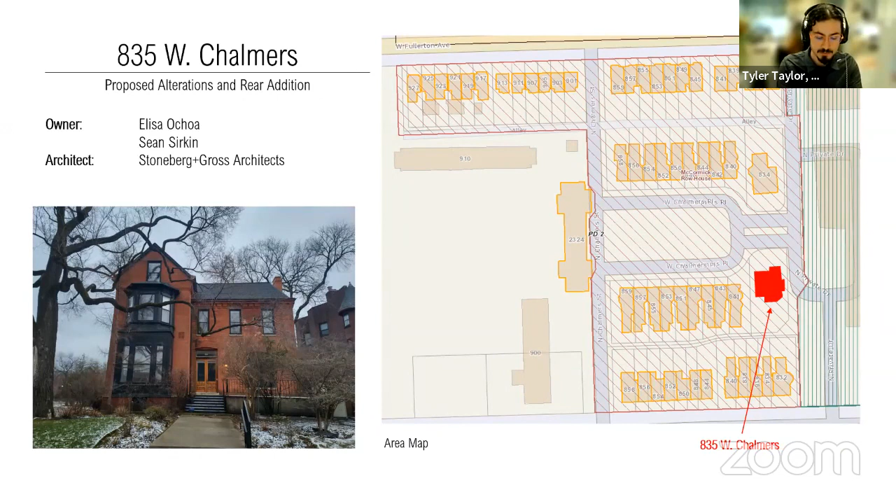This photo on the left shows the rear of the building. The existing wood bay to the left will be removed along with a portion of the surrounding masonry wall to allow a small shed roofed addition. The non-historic wood frame porch structure on the right will be removed and replaced by a new outdoor dining terrace covered by an open pergola.

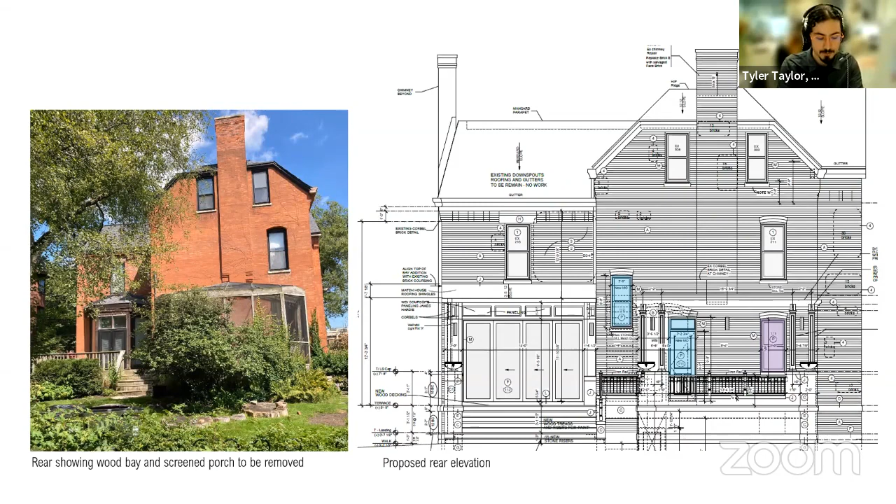The existing masonry opening for the rear door to the screen porch will be slightly enlarged for a new door to the dining terrace, highlighted in blue. A new window in a new masonry opening will be added to the rear adjacent to the door, also highlighted in blue. One window will be replaced in its existing opening with new clad-wood windows to match the historic profiles, highlighted in purple. The remaining windows, including frames, sashes, brick molds, and trim, are to be completely restored. Minor masonry repairs will also be made to all elevations.

The red highlighted areas in the existing plan to the left show the portions of the rear exterior wall to be removed. The proposed plans at right show the new addition, highlighted in blue, that extends 4'9" from the existing rear wall. The addition allows for the expansion of the family room on the interior and contains a new set of sliding doors to access a new rear deck.

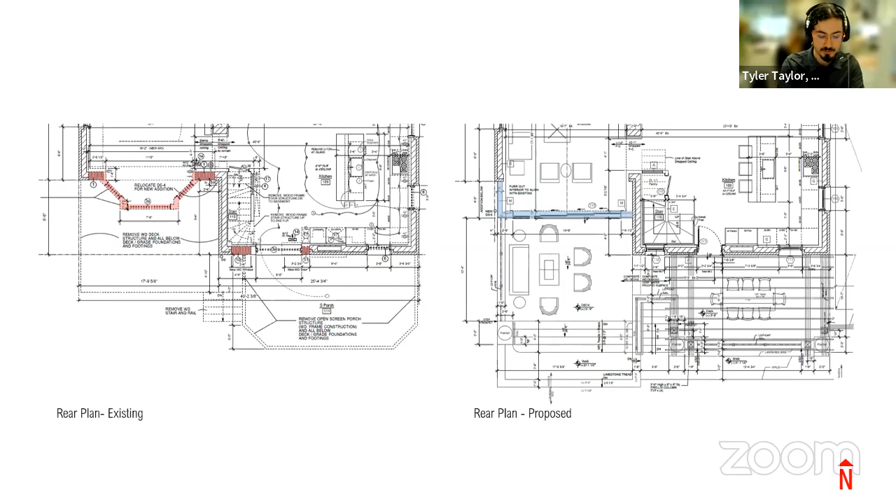On the east elevation, 7 windows highlighted in purple will be replaced in the existing openings with new clad-wood windows to match the historic profiles. The remaining existing windows are to be restored.

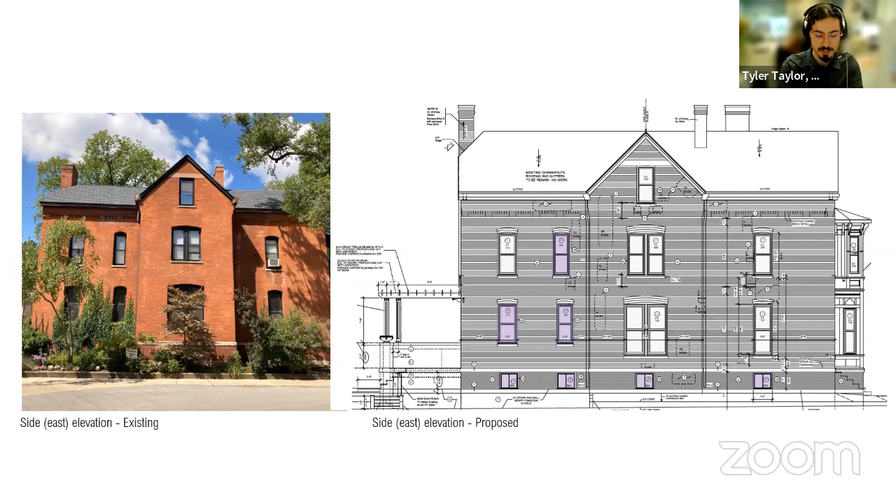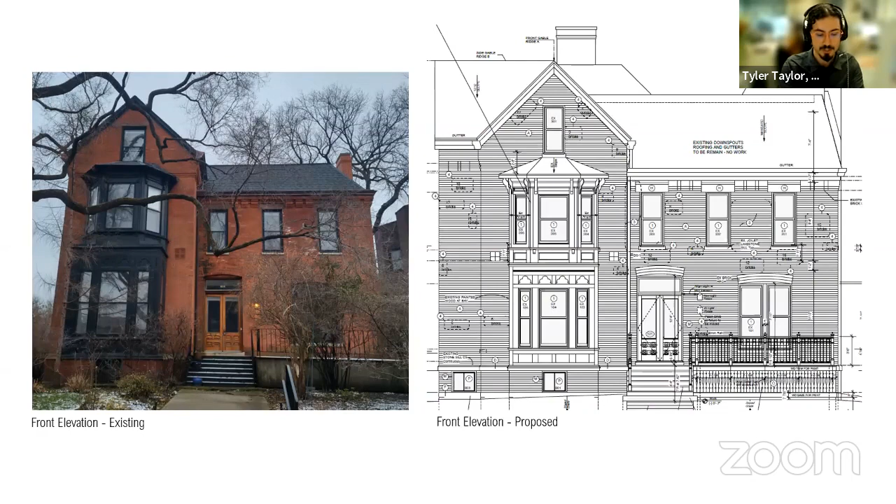At the front elevation, the historic wood bay to the left is to be restored. The porch is proposed to be rebuilt with new guards and rails. All of the windows are existing and will be restored. The original front porch was altered or demolished at some point in the past and replaced with a larger one. The existing porch is proposed to be reconstructed with the same area and dimensions.

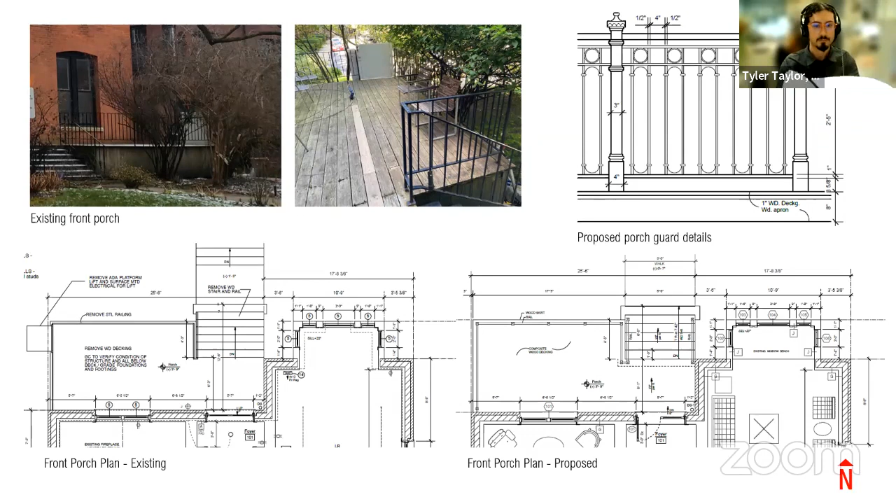The commission guidelines for inappropriate changes made in the past state that many buildings have been altered over time. Often these alterations represent inappropriate changes. When rehabilitation work is being undertaken, consideration should be given to removing inappropriate additions and changes, restoring the building to its original design and character. Existing situations that are inappropriate may be maintained if no substantial work is to be undertaken on them. However, existing changes that are inappropriate may not be retained if they are to be rebuilt or substantially altered.

Reconstruction of the porch at its current size does not meet the commission's guidelines. The owner is not proposing to reconstruct a roof over the porch to match the historic image, but constructing the porch to match the historic size will allow this to be done in the future if they so choose.

Staff recommends that the project as shown on the drawings dated 11/11/22 is approved with the following modification: the proposed new front porch shall be reduced in size to match the footprint of the historic porch based on historic documentation, or alternatively, the existing front porch may be maintained and repaired. Any replacement masonry units used in the repairs are to match the existing in size, shape, color, texture, and finish. Mortar shall match the existing in color, profile, texture, and strength or type. Samples of masonry are to be provided for review with the resubmission of the permit drawings.

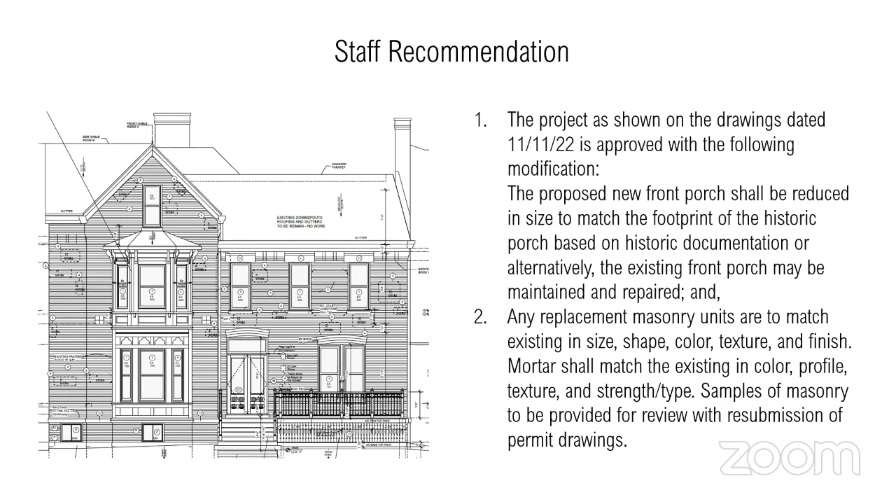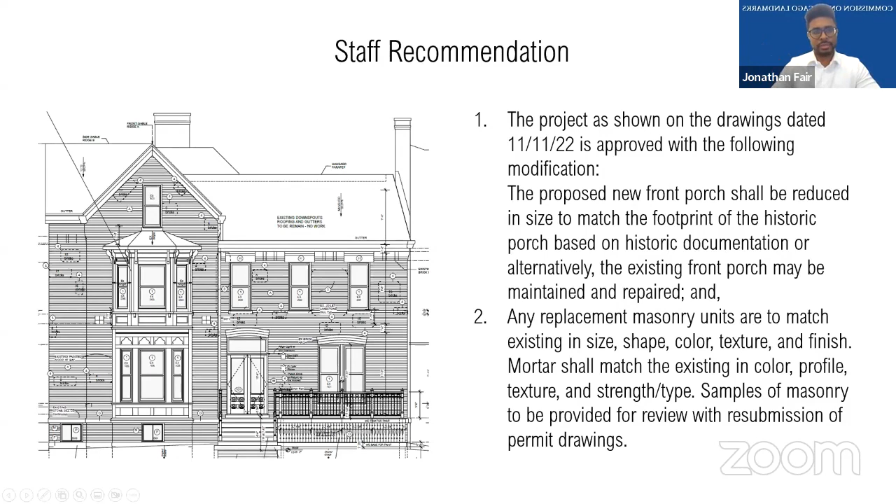I just had one follow-up question for Tyler. I wasn't sure if we knew from that Sanborn map you shared earlier what that dimension was. We don't have the dimension, but we're basing it on how it was drawn, showing that it's aligned with the front wall. The Sanborns are not always drawn exactly to scale, but the difference between the historic size and the current size is substantial enough that we'd be able to tell the difference from the Sanborn.

Okay, that makes sense. I think the two options or approaches are pretty clear. And Commissioner, if I might add, typically in these situations you could see some evidence physically on site underneath, if there are certain structural conditions where it was extended, and you may be able to judge based on physical evidence.

That's a good point, thank you for that. If I could just say, I've looked at the structure underneath the deck. As architects, we've looked at that, and you can see the original deck structure has been added to. The framing has been extended.

The other thing, thank you Tyler for putting this Sanborn up. I think this Sanborn map is fairly accurate, because if you look at the drawing of the front porch, the center pavilion, the entry pavilion extends beyond because you can see in perspective, by the depth of the column, that the column is in line with the masonry. So the Sanborn is pretty accurate — it's just a diagram, but a very accurate one showing that the front porch did align with the masonry, while the center pavilion, which extends higher hierarchically, was in front by the depth of the columns.

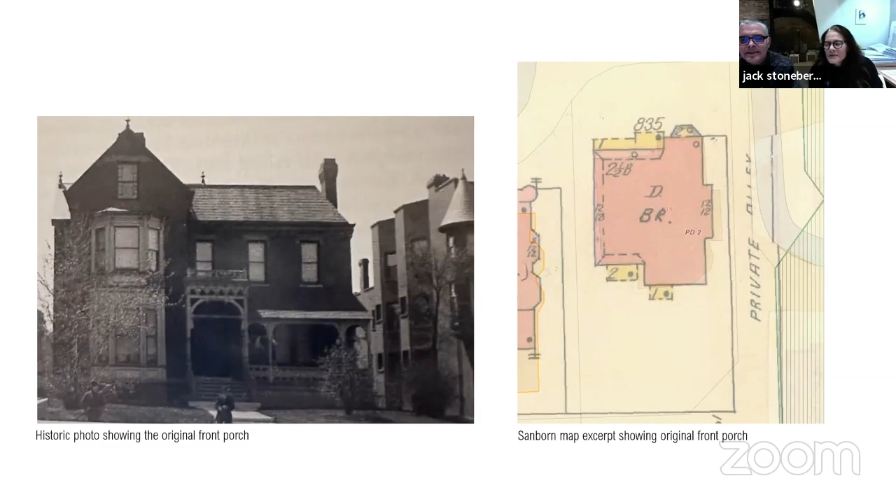So that's clear in terms of the depth. Tyler, we're pretty clear on how we're moving forward. Yeah, we just — thanks, I think Julie just wanted to say that IHPA has been a great asset and assistance to us over the last couple of months.

Yeah, thanks for that background. It sounds like the Historic Preservation Division has had a similar mindset as the Illinois Historic Preservation Agency. I think the recommendations are pretty clearly laid out. So with that, any other questions or points of discussion, commissioners?

Seeing no further discussion, I'd like to request a motion to adopt the staff recommendation. Do we have a motion? So moved, Commissioner Fair has moved. Do we have a second? Second, Commissioner Ponce — seconded by Commissioner Ponce.

We'll do the roll call. Commissioner Hughes — yes. Commissioner Rubin — yes. I'm a yes. The motion carries unanimously.

Congratulations. Thank you for the thoughtful work you guys have done, and good luck. Thank you, Tyler, for your help. Thanks, everybody. All right.

Moving on to item number 3 on the agenda: 841 West Chalmers, 43rd Ward, Alderman Knudsen, McCormick Row House District — the replacement of an existing one-story rear addition and a new one-story addition. And Tyler, here you go.

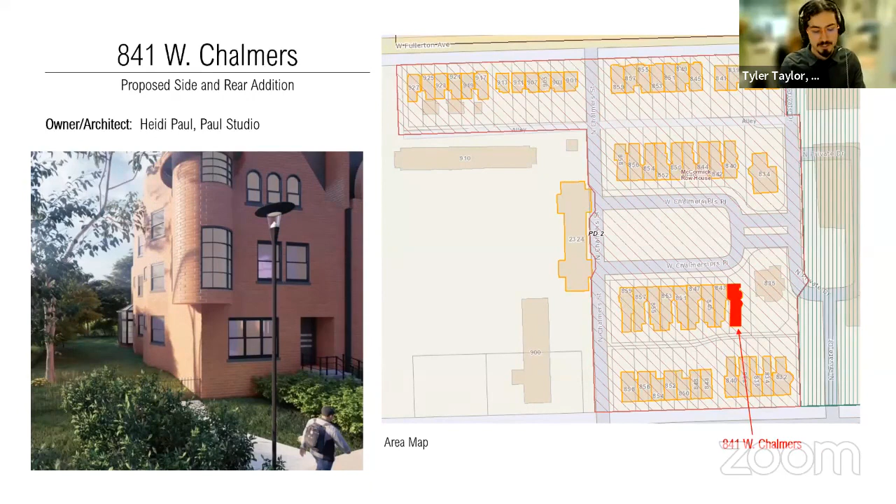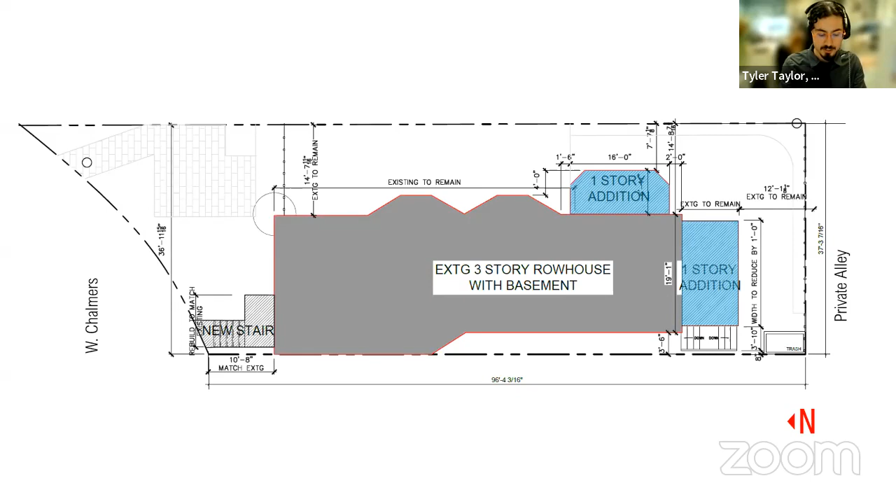Okay, this is 841 West Chalmers. The subject property is an end unit of one of the rows of row houses along West Chalmers in the McCormick Row House District. They were designed by A.M.F. Colton and Sons as housing to provide rental income for the Presbyterian Seminary of the Northwest. Two additions are part of this proposal: a new single-story addition located on the side of the building near the rear, behind an existing masonry bay, and a new rear addition. The front stair and stoop is also proposed to be reconstructed to match the existing.

The proposed side addition serves as a small sunroom and accommodates 2 flights of stairs that provide vertical circulation between the renovated kitchen at the first floor and the basement level.

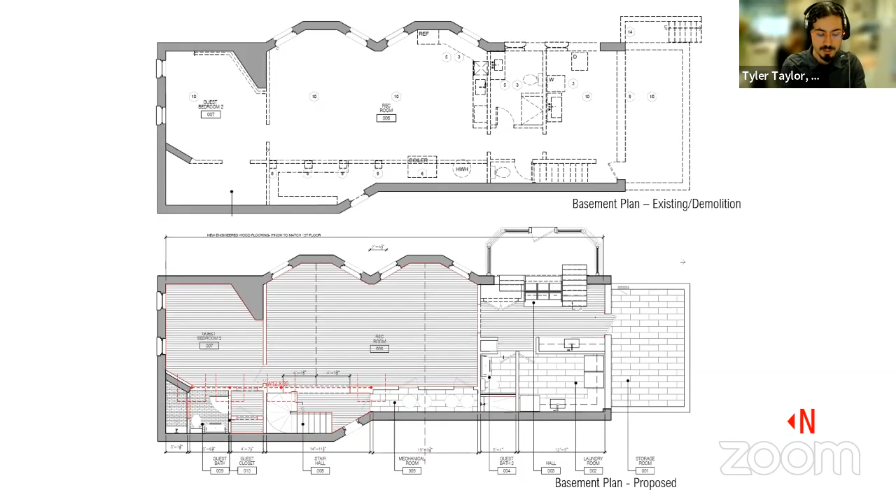A 14.5-foot long by approximately 12-foot high section of the north sidewall containing 4 windows will be removed to create the opening connecting the addition to the rest of the interior.

The proposed side addition projects 4 feet beyond the adjacent historic masonry bay. The masonry opening providing access to the existing rear addition will be slightly enlarged to 16 feet in width and 9 feet in height. The proposed rear addition will be set back slightly further from the sidewalls and extend the same distance back as the existing addition, giving it a slightly smaller footprint overall.

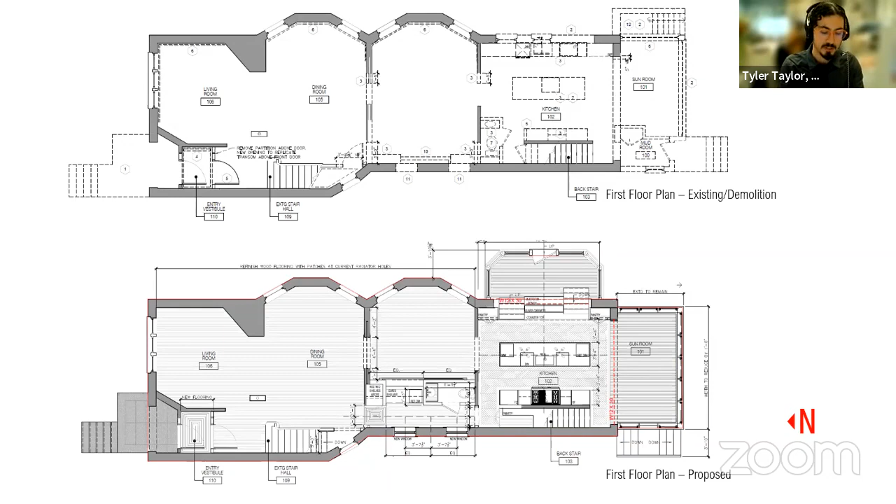The chamfered corners and plan are consistent with the angled walls of the masonry bays, and the large area of glazing references the conservatory-like additions that were common during the period of the historic building's construction, but does not directly mimic them. The proposed side addition is similar to one previously approved by this commission at 858 West Belden, and a historic side addition at 832 West Belden that has since been reclad at some point since initial construction.

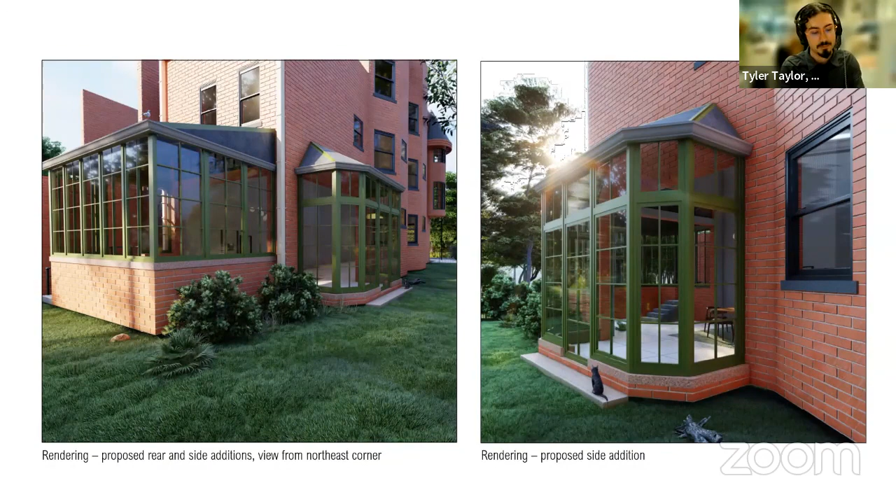The side addition will be visible from West Chalmers, but because it's located near the rear and only extends partially beyond the adjacent masonry bay, it will be minimally visible.

Staff recommends approval of this project as proposed on the drawings dated 10/16/22 with these conditions. First, masonry used for the base of the rear addition and side addition shall complement but be differentiated from the historic masonry. Samples of masonry units and mortar for new construction shall be provided for review with the permit application.

Second, window details for all new windows shall be provided with the permit application.

Commissioners, you may notice that one of the conditions originally included in the draft briefing notes relating to front railings has been removed. The front porches and railings are consistent throughout the entire complex, and that consistency has been maintained by the requirements of the Seminary Townhouse Association. Staff recommends that maintaining the railing consistent with the rest of the complex is appropriate.

We have received 6 letters of support from neighbors, which were included in your packet. We also have received a letter of no objection from Alderman Knudsen's office. The Seminary Townhouse Association has not issued a letter.

As with the other project, the neighborhood association was also contacted but did not respond. We have the owner and architect here who can answer any questions.

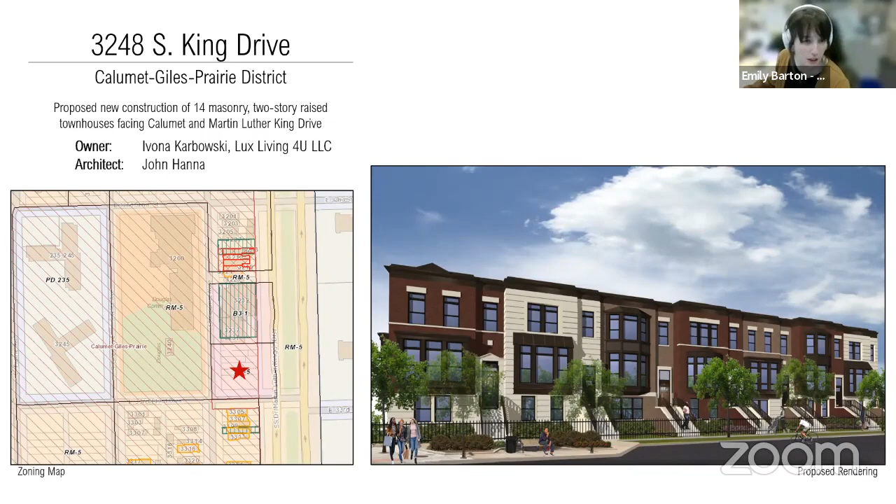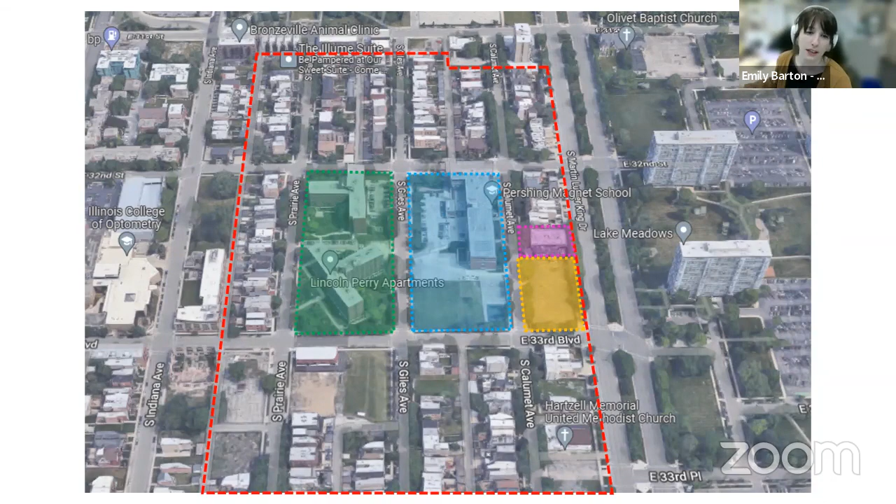Here's some of the character of Calumet south of the site and the rest of the district as well, just for your reference.

As I mentioned, the development has some unique context with 3 of the lot elevations facing streets. Because of this siting, you can see there are front setbacks on 2 elevations shown with green lines, and side setbacks on 1 shown in orange.

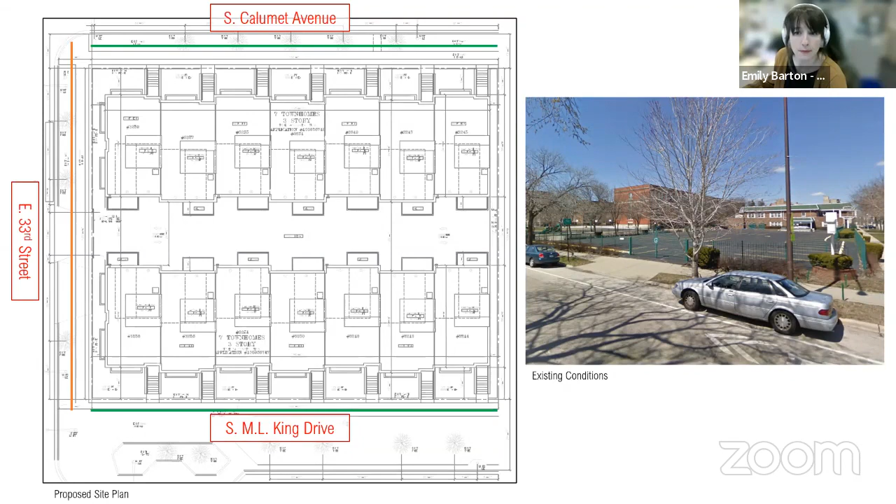The proposed townhouses are 2 separate massings with 7 attached units facing Calumet and 7 attached units facing King Drive. The proposed development, outlined in red, will have front yard setbacks of 10 to 12 feet, depending on the unit, both along King Drive and Calumet.

Although the predominant front yard depth along Calumet is consistently 15 feet on this block, the rest of the district features a whole range of front setbacks, including 0 setback at 3434 South Giles, all the way up to nearly 19 feet at 3130 South Prairie.

The stretch of King Drive features the rear yards of buildings on King Drive. You can see highlighted in yellow, it's mostly garages. Because of this, there aren't really any front setbacks along King to use as context. So because of this wide range of district-wide front setbacks, staff recommends that the proposed 10 to 12 feet is compatible.

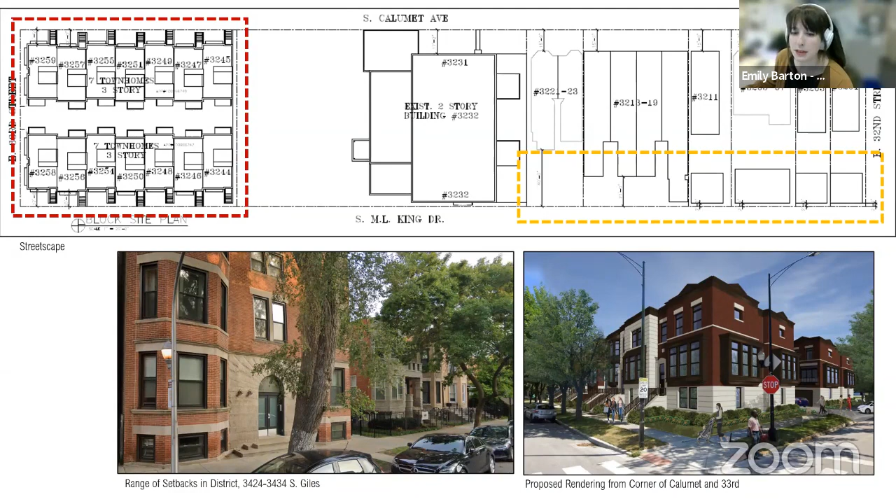The development side setback along 33rd Street is 5 feet, with a proposed driveway midway utilizing an existing curb cut. A new 5-foot metal fence is also proposed to be installed around the property with a rolling gate at the driveway.

Each building is proposed to be 146 feet long, with each unit approximately 21 foot 7 inches wide. The 2 buildings are 38 feet 8 inches deep, separated by a 26-foot wide driveway, which is used to access each unit's attached 2-car garage.

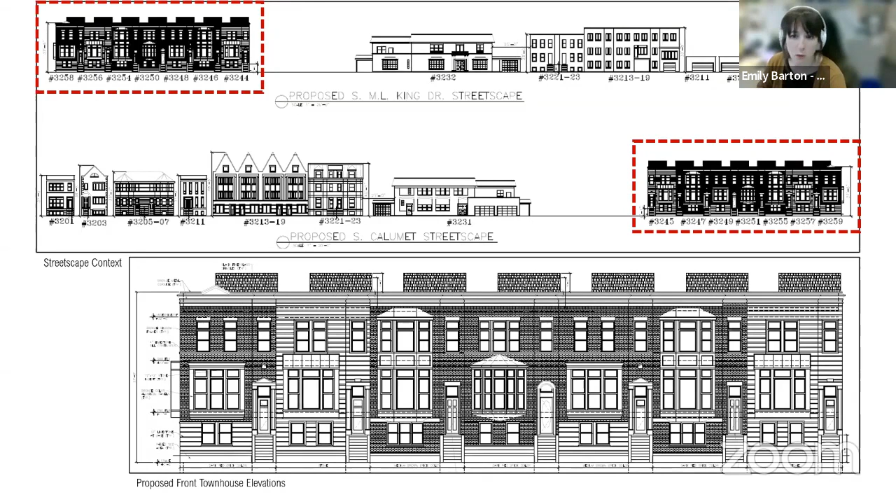Each unit features a raised entry, compatible with the other stoop heights throughout the district, at 6 feet. The buildings are proposed to be 37.5 feet tall, with an additional rooftop access doghouse projecting another 4 feet above the parapet. This is all well within the range of historic building heights found in the district.

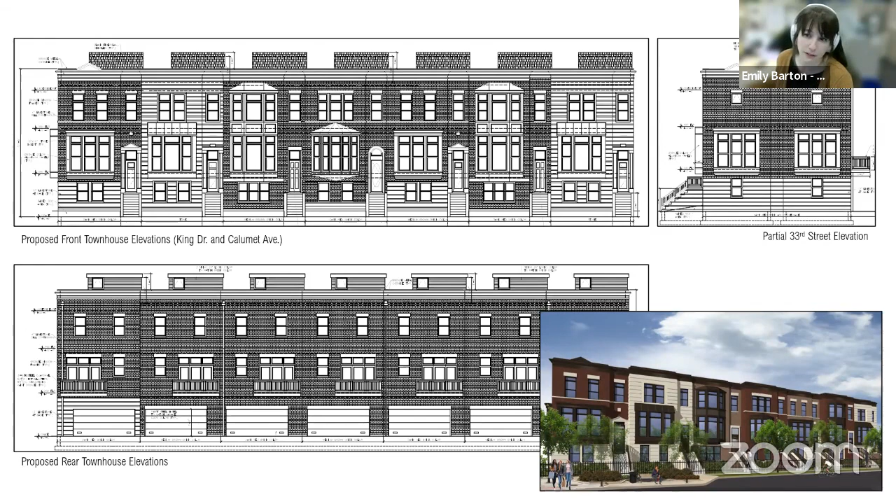A pressed metal cornice caps the building with matching protruding metal bays, both characteristic of the area. The use of masonry cladding and tall stoops are features typical for residences in this district. The townhouses feature 3 main designs with different variations, making each unit facade slightly different. They feature differently shaped bays, different door surrounds, and different window configurations in order to create visual interest.

Here are just some more examples for you within the district showing the combined use of masonry with pressed metal bays.

The predominant materials proposed are brick and cast stone, in 2 different colors of brick: Canyon Clear Smooth Belden and Claret Clear Smooth Belden, both modular brick in two different colors. One is browner, one is redder. The cast stone is General Shale Limestone by Renaissance.

The three different cladding materials alternate, so no two materials are next to each other. Because there are only 7 units per street elevation, this gives enough variation so that there are no exact repeats.

Staff recommends that the color of the mortar shall be revised to match the masonry color, and final material samples need to be submitted with the permit application. The buildings incorporate smooth cut limestone sills, lintels, and cornice, and the stairs are proposed to be cast concrete with metal railings and newel posts.

Both the Alderman and GAP Community Organization have reviewed this project, and a letter of support was included in your packet. You can see we're recommending approval with the conditions shown. The architect and the property owner, I believe, are both here if you have any questions for them, or me.

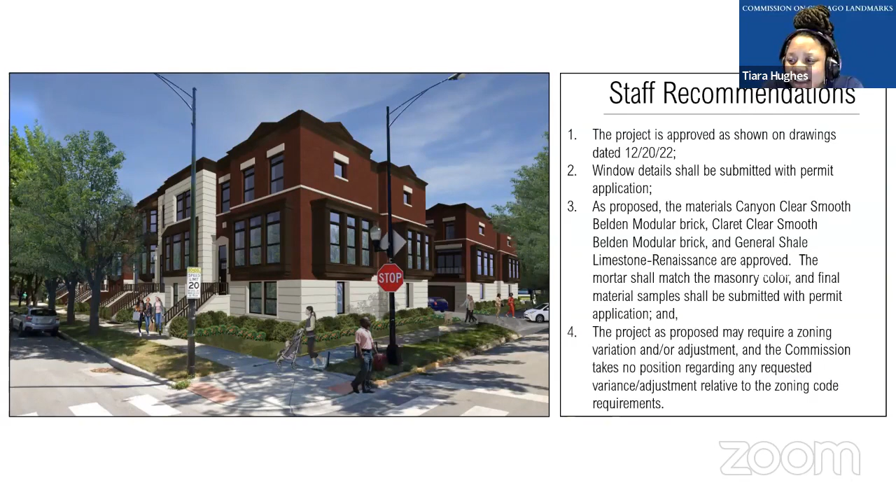Commissioner Hughes. Yes. Hi, Emily. Thank you. Can you go back to your last slide?

I'm a little concerned, or in question of the 2 brick colors at the bottom. There's much more variation in the rendering, which is nice. It is providing that contrast, but the actual samples look very close in color, and I'm afraid won't have the same effect that the rendering is showing here. So whenever you guys are approving materials, can we make sure those have a little bit more variation? Yeah, absolutely.

Thank you, Commissioner Hughes. Good point. Are you saying that not only the contrast between the materials, but within the actual field of the masonry that it shouldn't be so monolithic? There's a couple, is that what you're referencing, or just the colors? Referencing the colors of the 2 bricks.

I would maybe chime in and say maybe a little bit of both. Usually when you get the boards of the masonry samples, there's a range, but I think Commissioner Hughes picked up that the 2 tones, which are supposed to be more of a tan brown and more of a reddish brown in the renderings, are coming across as pretty close. And then the 2 sample images read very monolithic. So I think some variation helps it fit in a little bit with the rest of the historic district.

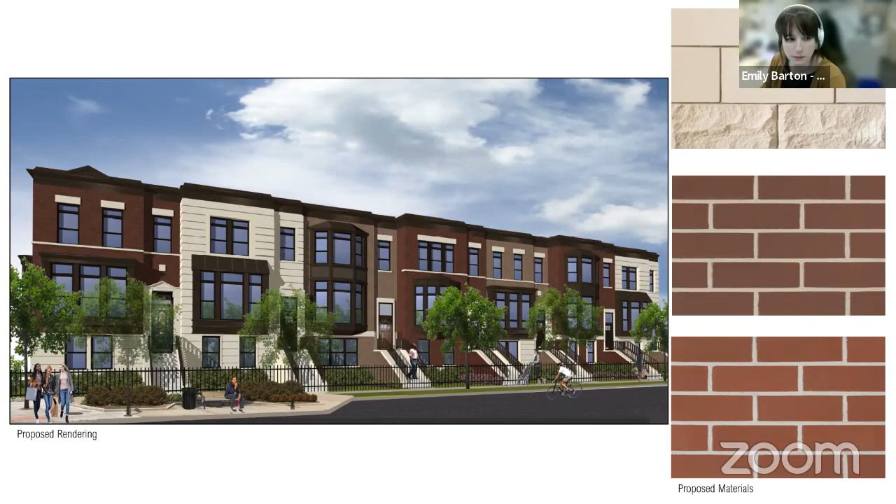Thanks, Commissioner Hughes. Any other questions for Emily before we hear from the architect? Seeing none, let's hear from the architect, project architect John Hanna.

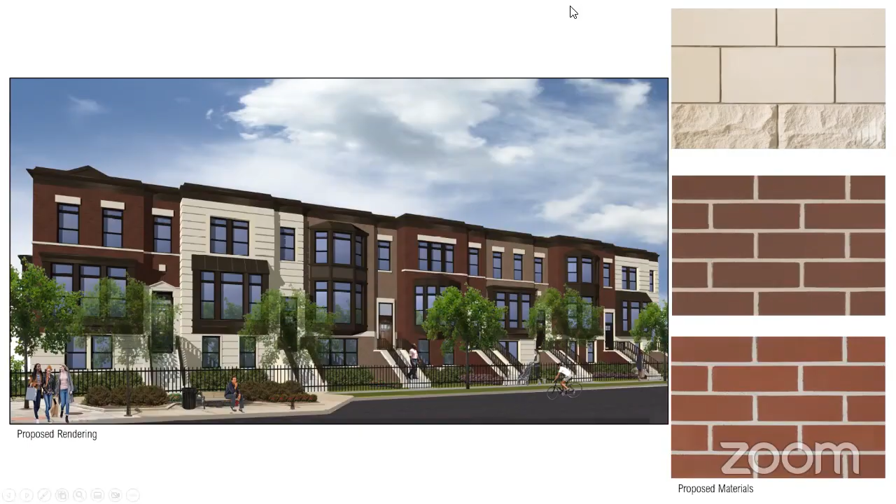Yeah, hello, John Hanna here. I'm very happy about this project. This site was zoned commercial, and back many years ago they widened King Drive, which exposed the rear of many of the houses on this block. So the ability to do townhouses on this property puts 2 fronts on this, one on King Drive and one on Calumet. So I think it's an asset, and I'm happy that we were able to achieve this.

Again, thanks for Emily's help and all your support in this, and we look forward to this. Thank you, Mr. Hanna.

And are you open to refining the bricks a little bit? Oh yeah, I think that's a good comment, and we appreciate it. We will make that suggestion come true. Excellent. Even within each color palette, maybe there can be a little more variation so it's not just one solid brick color throughout. Of course, no problem. All right, commissioners, any questions? Points of discussion?

Commissioner Hughes. Sorry, you guys, I'm chatty today. Another thing, this is a compliment to the architect and owners here. I'm extremely excited that this block is going to be repopulated. And I also appreciate that you put a cornice on top of the townhouses to give it a nicer finish, and to keep everything cohesive with all the different variations. So kudos to you guys.

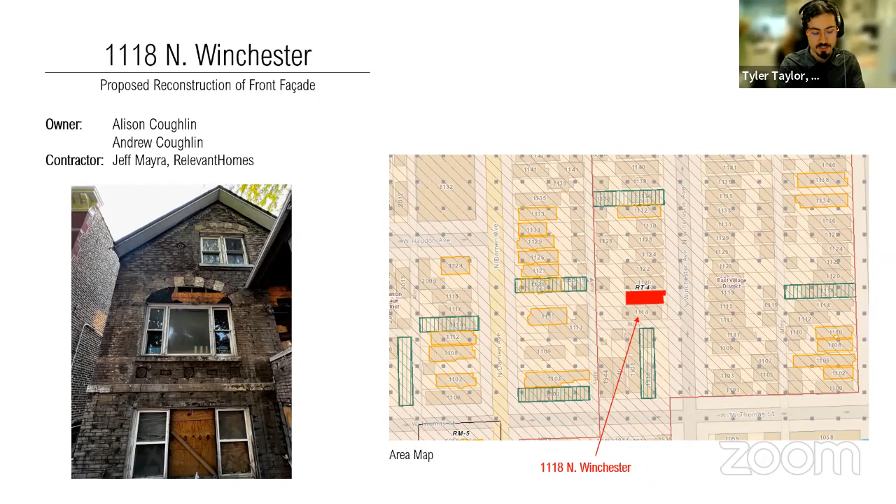Thank you. This is 1118 North Winchester. This project is a proposed reconstruction of the front facade to address a violation. The building is located within the East Village District, mid-block between West Thomas to the south and West Haddon to the north. The subject property is a worker's cottage that at some point had faux stone cladding installed over the original brick facade. The original windows and porch had been replaced as well.

In August 2022, a permit application was received for the removal of the faux stone cladding and restoration of the original brick beneath. The permit was approved with the condition that historic preservation was to be notified if, upon removal of the stone cladding, the condition of the original facade required any change in the scope of work.

Per the applicants, after the cladding was removed, the porch was in danger of collapse and the decision was made to demolish it. After the porch was demolished, there was concern the rest of the facade was unstable, and it was demolished as well. Historic preservation was not notified, learned of the demolition after it had already happened, and did not have a chance to verify the condition of the original facade prior to its demolition.

The Department of Buildings visited the site at Historic Preservation's request and issued a stop work order. The owner is required to get a new permit to address the violation.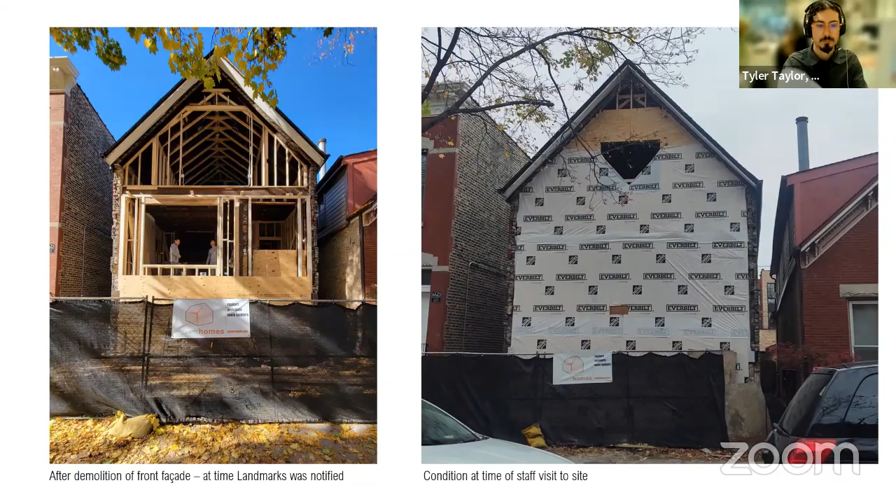All of the limestone from the window arches and bands was salvaged and will be reinstalled. The medallions at the first floor level were salvaged in good condition and will be reinstalled. The medallions at the second floor level were salvaged but were damaged; these will be repaired and reinstalled.

An intact stained glass window was discovered behind the plywood covering the first floor transom and will be reinstalled. A new stained glass window will be made for the transom above the second floor window.

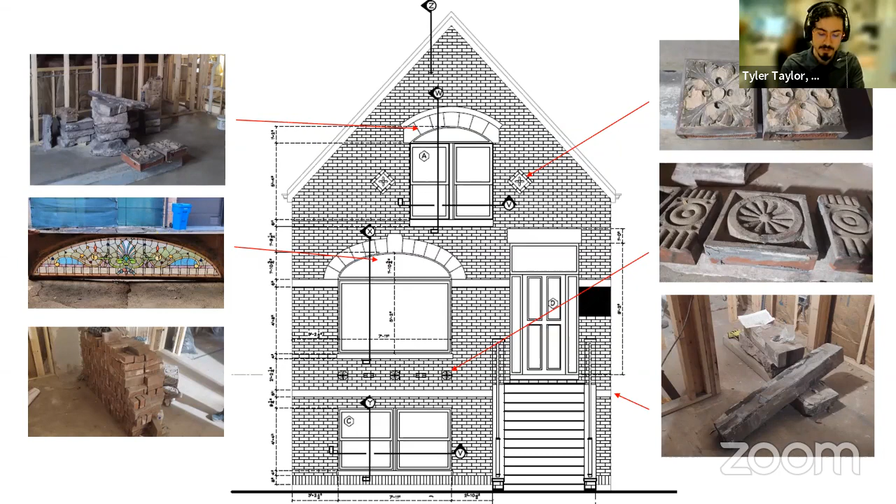Very little of the face brick was salvaged, shown here on the bottom left. At the time staff visited the site, the rest of the face brick had already been disposed of.

This proposal is for a reconstruction of the facade as close as possible to its historic condition, with the information available and with new and salvaged materials. The salvaged materials will be reinstalled at their former locations, and the brick coursing will be replicated as closely as possible. The limestone bands will be replaced.

Openings will be restored to their original size and shape. The arches above the windows will be reconstructed with the salvaged limestone. The masonry opening for the entryway had been modified and will be completed with a new stone header.

The opening for the basement window had been enlarged on the north, or right side, in the elevation only, and the reconstructed opening will be restored to its original width, aligned with the opening above.

The front porch will be replaced with a new one without a roof. The design should be modified to eliminate the solid masonry walls, and all railings should be open metal.

Note the proposed window configuration is different than the non-historic windows that were demolished. There are historic precedents in the immediate area for the proposed configuration, with a transom over a single picture window at the first floor level.

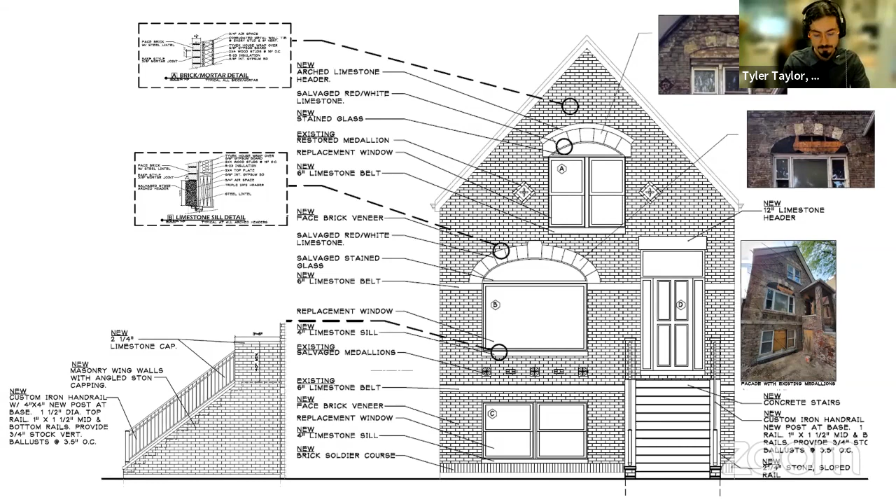The brick is proposed to be replaced with new brick manufactured by the Summit Brick Company, product number LB810, in burgundy smooth color. This appears to be a very close match to the original in color, texture, and finish.

The new bricks are 5/8 of an inch shorter than the original and approximately 1/8 inch taller. Because of this difference, it is not possible to reuse the salvaged bricks along with the new bricks, as the difference in size will not allow the correct coursing pattern.

The original raked mortar joints were 5/16 inch with dark gray mortar tinted slightly red to match the brick. The details here show the joint at 3/8 of an inch. We are recommending the joints be reconstructed at 1/4 of an inch to account for the difference in height between the original and new brick, to allow the overall coursing to match the original.

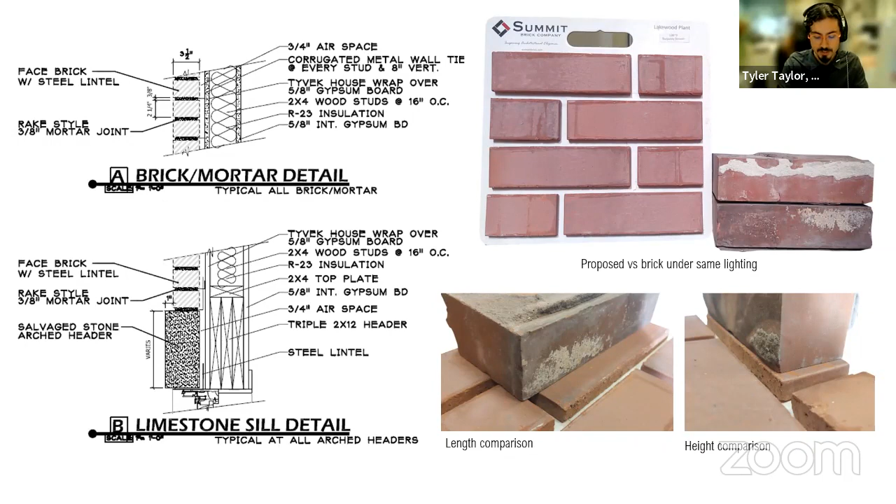Staff recommends that first, as proposed, the front facade removed contrary to the approved permit shall be reconstructed to match the removed facade in size, brick coursing, detailing, and overall appearance. Since the historic brick was not salvaged for reinstallation, the reconstruction of the front facade with the Summit brick burgundy that I introduced, matching the historic bricks as closely as possible in size, color, and texture, is approved to prevent further deterioration. The salvaged medallions from the first floor, the repaired salvaged medallions from the second floor, and the salvaged stone lintels and window headers shall be reinstalled.

Second, a mock-up of brick coursing and joint size, mortar color, and profile shall be reviewed and approved by historic preservation staff at the site prior to construction. And third, the proposed drawings dated December 22nd, 2022, shall be modified to address the following.

As mentioned, the front porch railings shall be open metal railings. Dimension details of the eave and soffit shall be provided with permit plans. The mortar joint shall be 1/4 inch wide. Restoration details of the salvaged stone medallion shall be provided with the permit plans, and brick molds matching the historic profiles shall be installed around the replacement windows, with details provided in the permit plans.

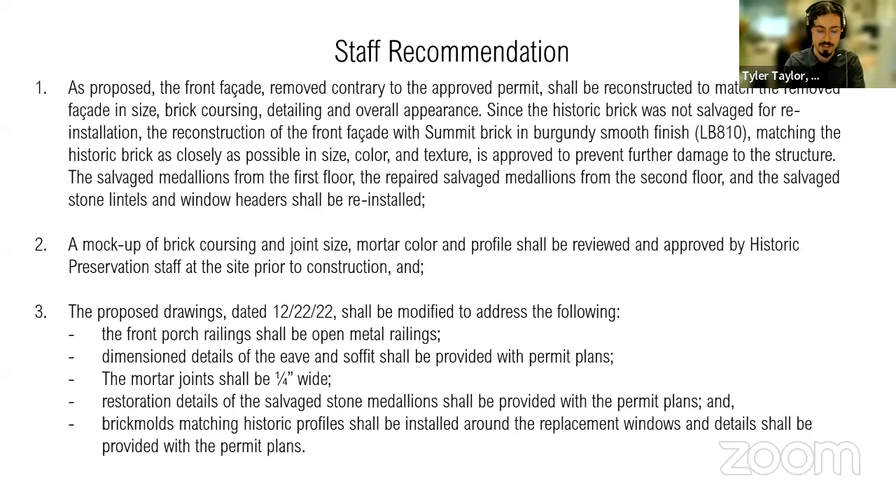Alderman Hopkins' office is aware of the project. The East Village Association was provided with the facade drawing for review, but did not offer a comment prior to this meeting. The contractor and owners are in attendance and able to answer questions. Thank you. Excellent. Thank you, Tyler.

Commissioners, any questions for Tyler before we hear from the owner? Commissioner Rubin? Yeah, I did have a question. Given the condition of the original bricks that was fairly significantly deteriorated once the paneling was taken off, in trying to find the right matching color for replacement brick, were those the best examples of the retained brick cleaned before the color matching was done?

Oh, you have an example right here. I have, okay, great. I have the brick on my desk. Excellent. And I also have, I have the sample that was provided as well. Okay. Yeah, so we looked at these in person.

Okay, good. Just making sure, because there's so much deterioration, and only able to salvage a little bit, making sure that all the gunk and whatever needed to come off of that original brick before doing the color matching, rather than doing it to the dirty brick. Just good practice, making sure it's happening.

Great. Thanks, Commissioner Rubin. Thanks, Tyler. Any other questions for Tyler? Seeing none, let's hear from the owner or the development team.

Is it Jeff Myra that's here? I'm Jeff, I'm the general contractor. Jeff Myra. Myra. Thank you. And I'm Andrew Coughlin, one of the co-owners with my wife, Allison. Great. Would you like to make a statement?